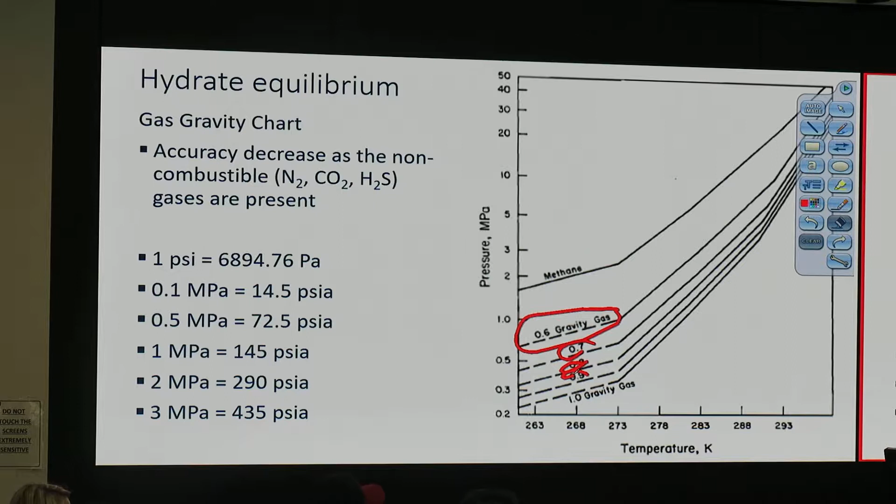Another way of looking at hydrate phase envelope, we can predict it based on gas gravity. This is 0.6, 0.7, 0.8, 0.9. How much is the methane molecular weight? About 16? Around 16, so methane is 16.

Why do some gases have a specific gravity of 0.9? What happened? What do you think happened that makes gas have higher specific gravity? He said it's heavier. How come methane becomes heavier? When you produce from the reservoir, does it give you pure methane? Will it give you propane, butane, maybe C5, C6, a little bit, maybe C2? It gives you all things.

Can it give you carbon dioxide? Is carbon dioxide heavier than air or not? What's your name? Zach, what is the molecular weight of carbon? 12? What about oxygen? 16, oxygen twice is 32, plus that becomes 44. 44 is more than 29 or less than 29? So carbon dioxide has higher density than air. So if you have methane plus carbon dioxide, your gas gravity can be 0.8, 0.9, or something, it could be more than 1.

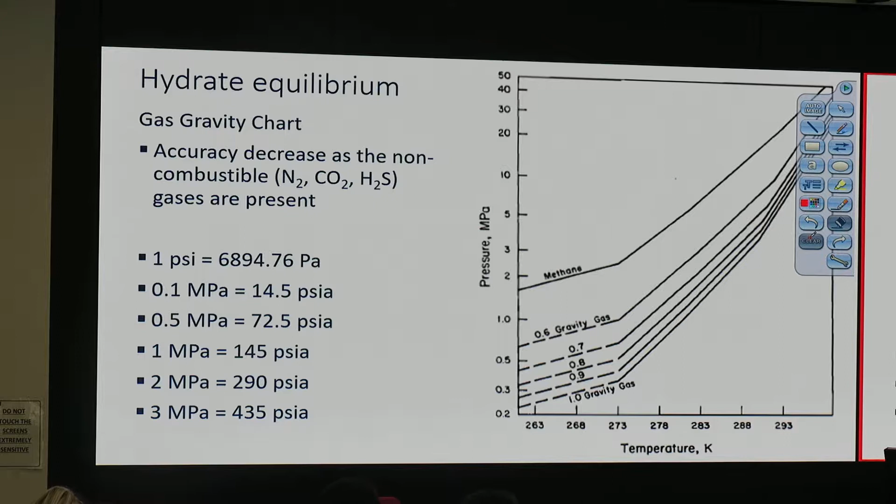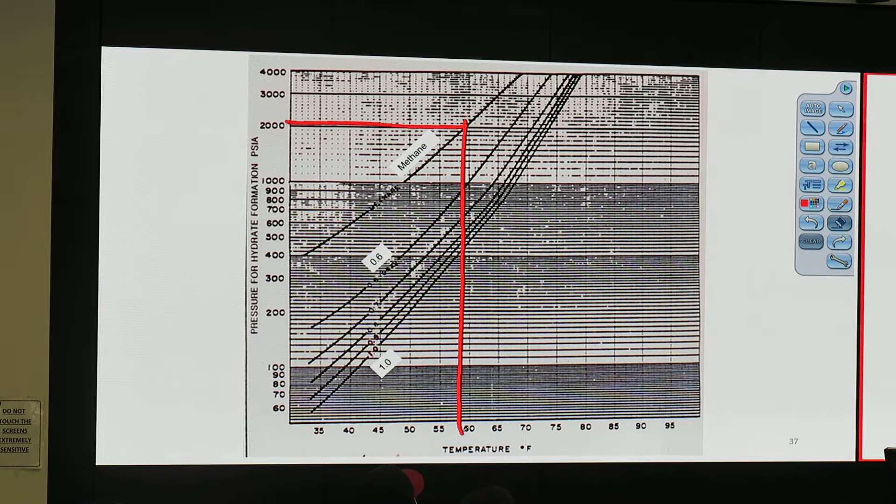Here's another chart that's in PSIA, maybe this helps you a little bit. This is in Fahrenheit. So if I have the pressure before the line heater about 2000 psi, pretty high, this tells me at about 59 Fahrenheit we will form hydrate. 59 and below. So if I have gas coming in at 2000, it's pure methane. We have gas coming in at 2000 psia, and my temperature is 70, I'm fine, I don't form hydrate. But if I'm at 50, sometimes it gets a little bit cold, like a snowstorm, we may form hydrate, and that may not be good. This chart can tell you that.

Do you know how to read the chart? It is going to be in the exam somehow. Any questions on the chart? Okay, let's move on.

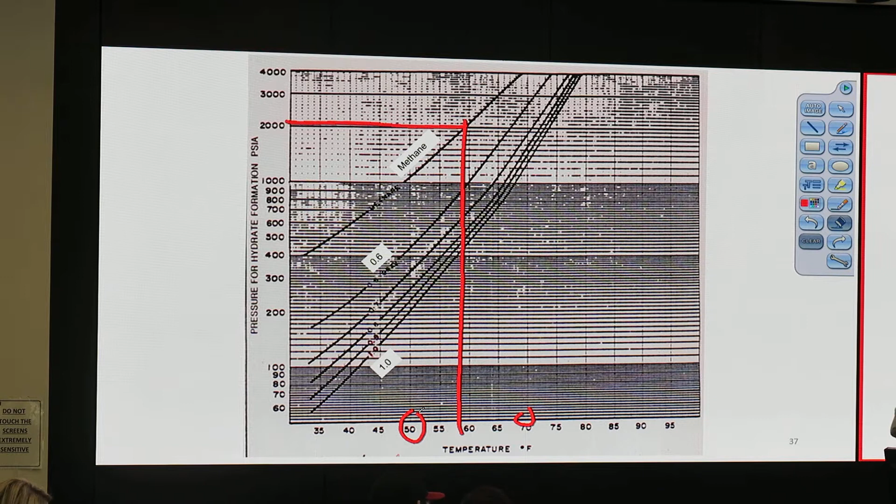Preventing, how do we prevent it? We avoid it, we don't want it to form. We may avoid going inside the hydrate phase envelope, or we put inhibitor in, or we remove water, dehydration. How do we remove water? I know I didn't teach anything about that yet, but what do you think? Dehydration, what is the chemical inside? Is it green? Maybe it's not green. Yes, it is glycol. We can use glycol to remove water.

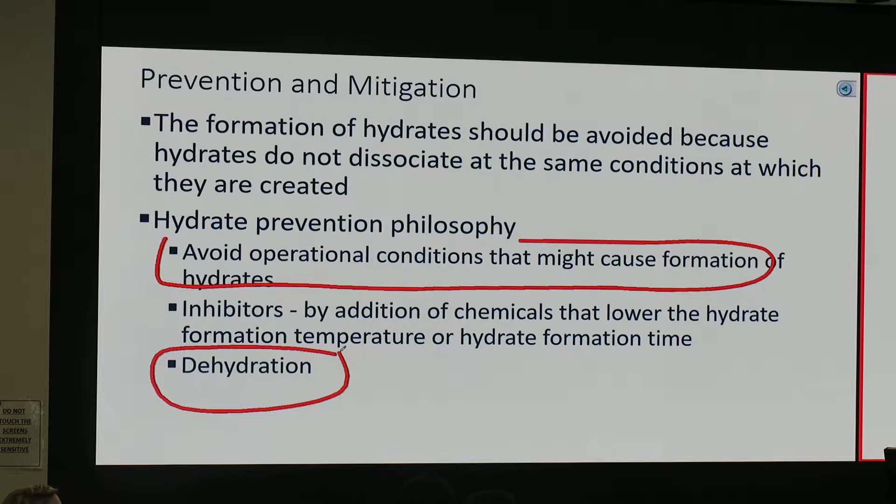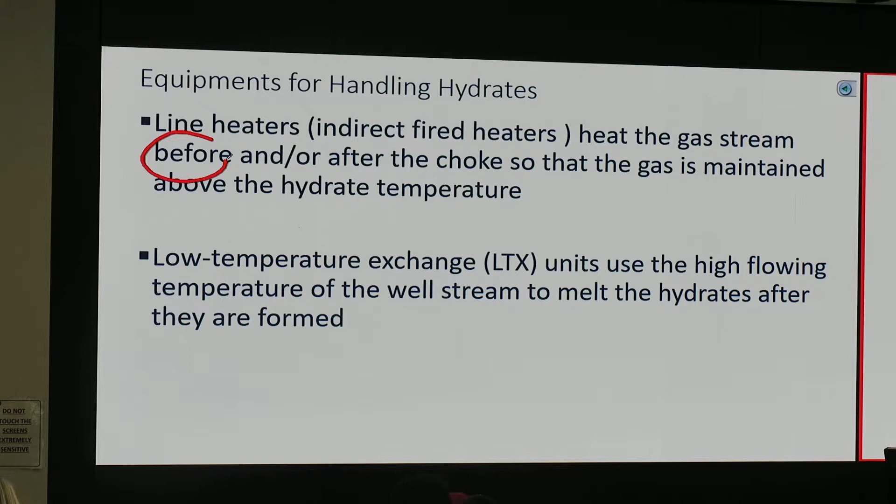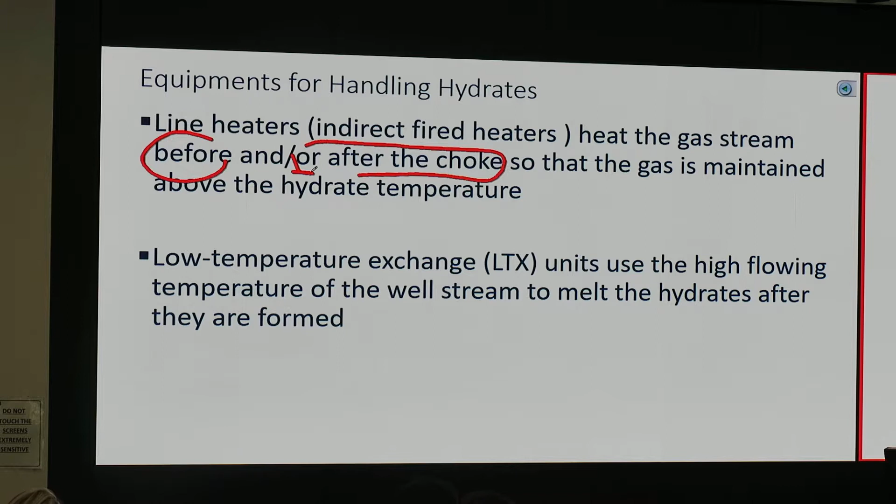So to handle this hydrate, we can use a line heater. Line heater came up in the test a couple years ago. I asked if the line heater is a direct heating unit or indirect heating unit. Many people failed, so it's an indirect fired heater. It heats the gas stream before, and it could be before or after the choke, but mostly before. Sometimes very rarely it's after, but most of the time it's before. So the gas maintains above hydrate temperature all the time, both before and after choking.

So when we choke, the temperature will drop. How much will the temperature drop? 10 Fahrenheit? Kenny, how much will the temperature drop from hydrate? It's going to depend on the temperature drop or the pressure drop. I don't know either. We look at the chart. The chart will tell us, but we need to know how to read the chart.

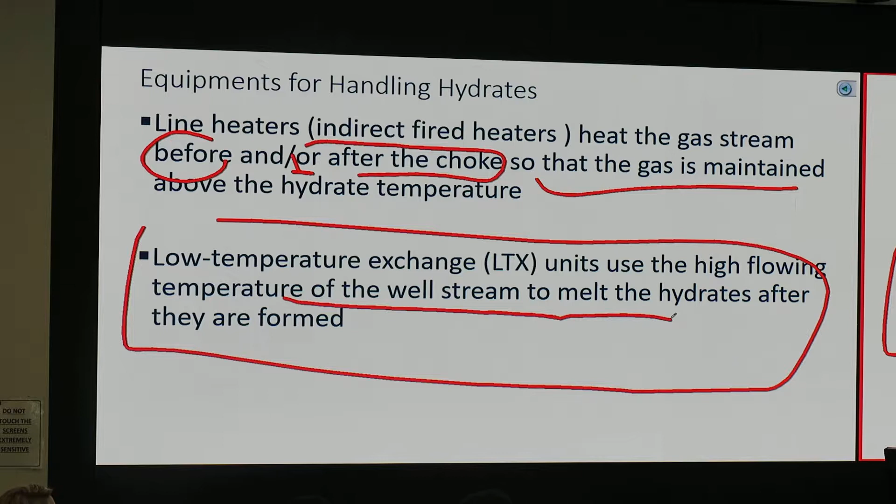Another unit is LTX, low temperature exchanger. This one operates in a different way. It lets hydrate form and uses the heat from the flow itself to melt it, the temperature of the well stream to melt the hydrate after they form. So it lets hydrate form.

Temperature drop calculation, this is about JT cooling. It's not always cooling. At the high pressure case, when the pressure drops, it can be hotter. But most of the time, at the lower pressure case, when the pressure drops, it's cooling. Most of the time it's cooling, but it can be heating too. I will show you in the Mollier diagram what case it will be heating.

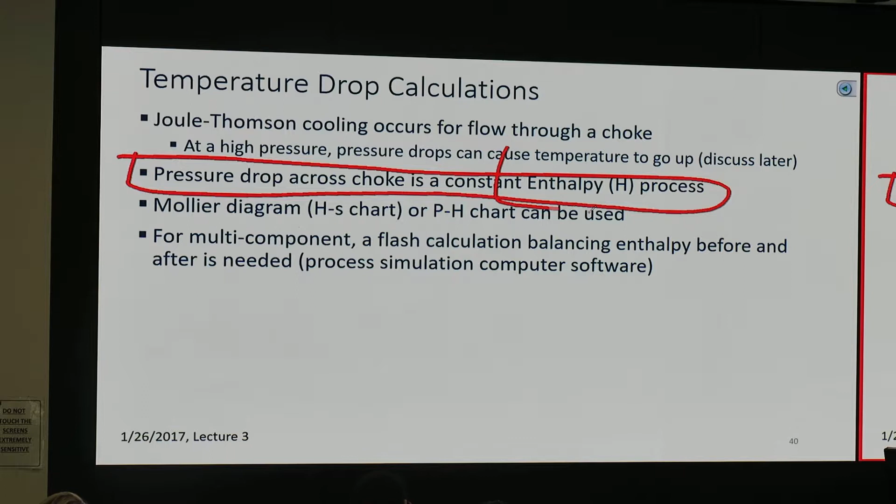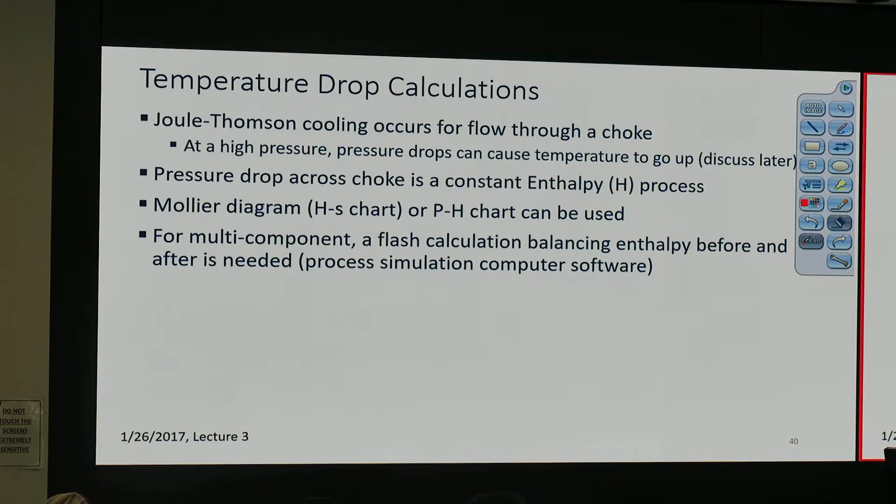One thing you need to memorize: pressure drop across the choke is a constant enthalpy process, or you can roughly assume it's a constant enthalpy process. It appears every quiz, every exam, every year, so put that in. Constant enthalpy means capital H stays the same, there's no heat putting in or heat loss during that short distance. So at the choke, it just goes through the restriction and the pressure drops a lot, but we didn't put any heat on it, or we assume no heat loss. So we use the Mollier diagram or maybe pressure enthalpy chart to find out. If we have multiple components and don't use the chart, we use software. So in this class, we teach you how to use the chart. This is the chart.

This is a pressure enthalpy chart. The one you get in the exam will be bigger and readable. This one I know isn't quite readable.

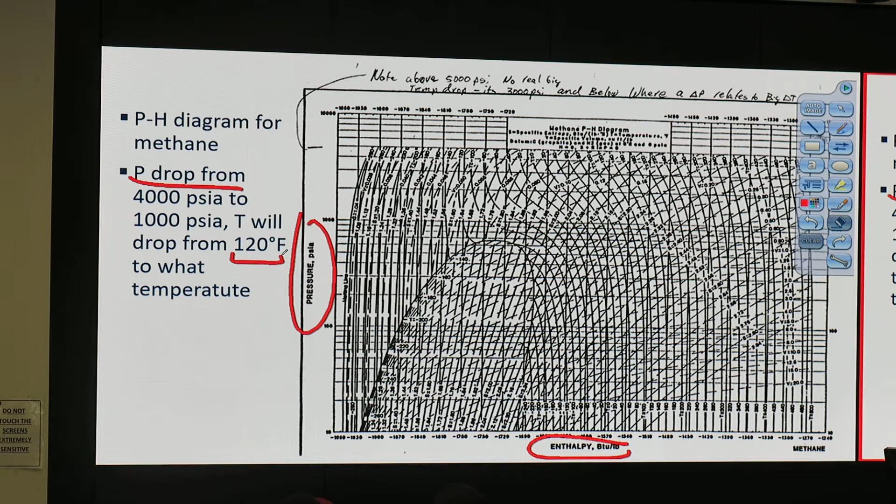Let's take a look at pressure drop from 4,000 psia to 1,000 psia. Temperature will drop from 120 Fahrenheit to what temperature? First, assume that we use the right chart. This says methane.

Methane pressure enthalpy diagram. If you don't have pure methane but natural gas with specific gravity of 0.7, use the chart that is for 0.7.

This means you need to know how to calculate specific gravity of gas. Who knows that or who doesn't know that?

Maybe my question isn't quite specific. If I have 90% methane, 10% carbon dioxide, do you know how to calculate average molecular weight?

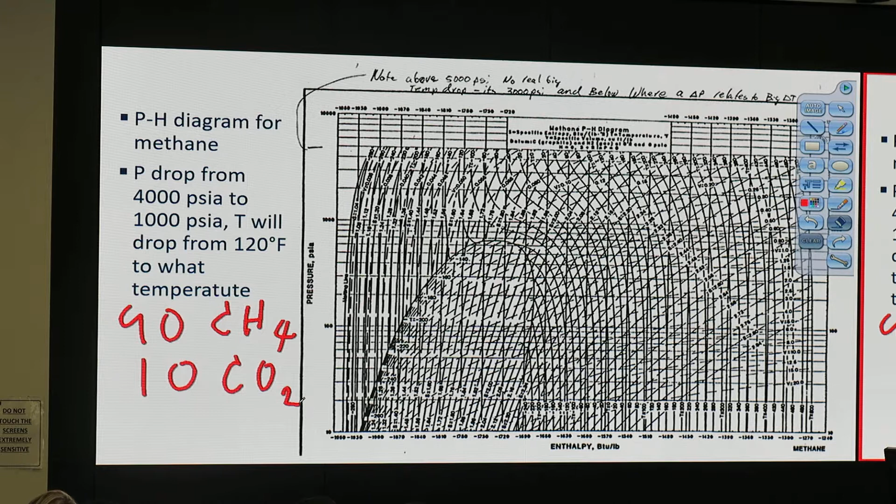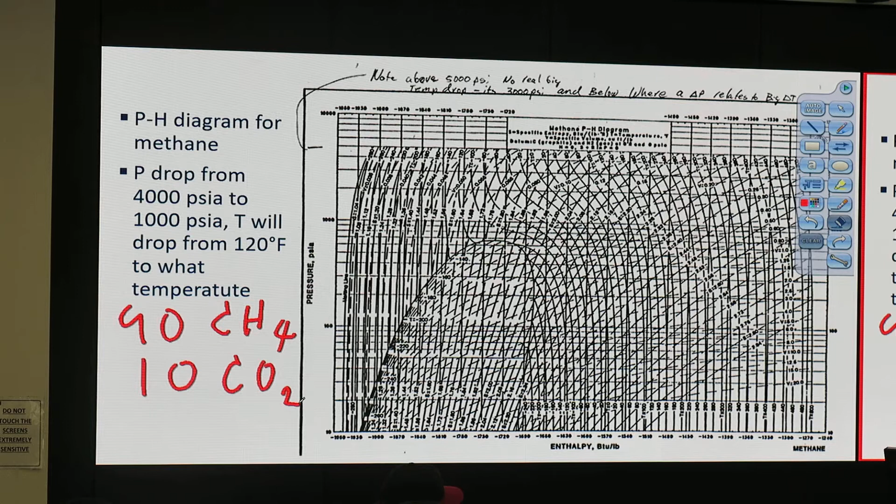You think you know? Who doesn't? We'll have the lecture about that, but it's important. Because if you don't know that, you don't know which chart to use. I give you 5 charts, you use the wrong chart, the answer is wrong, say it with me here.

How do we read that? First, we need to know which line is which. You see the red line over there? That one is a constant temperature line. So this axis is pressure. That red line is a constant temperature line.

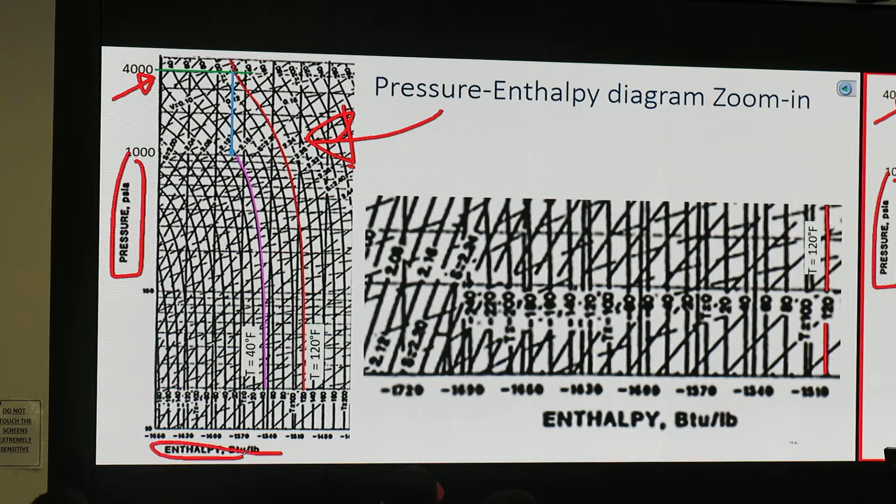The horizontal green line is a pressure line. The place where red crosses with the green is your starting point. We start at 4,000 psia and 120. We have pressure drop across a choke, which is a constant H or constant enthalpy process, enthalpy doesn't change. So we just move down vertically.

Until we meet the line that has pressure of 1000 psia. Then we read the temperature using the purple line. The purple line says that is 40 Fahrenheit. Then we know temperature will drop about 80 F. Good?

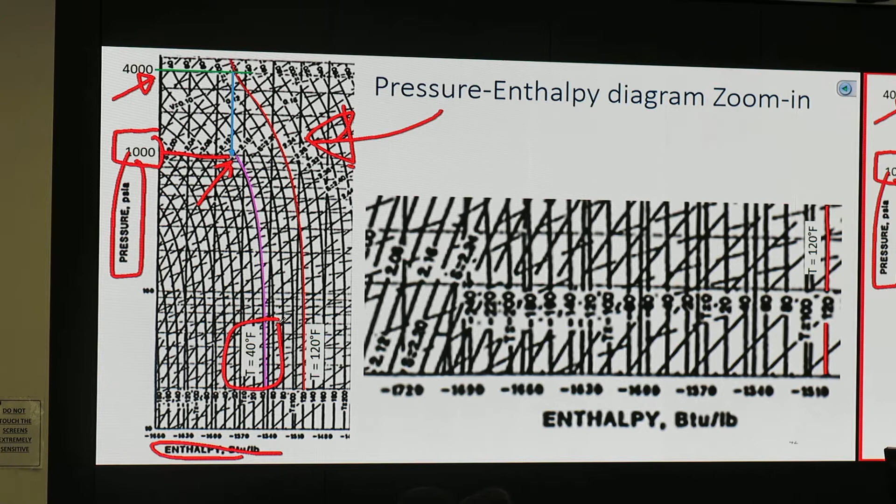Next method, we can use this chart for a quick approximation. This chart talks about temperature drop. Initial pressure in PSIG. This chart is from GPSA. So how do we do that?

We start from 4000 PSIG. How much is the pressure drop? This line on the curve side is delta P. 4000 minus 1000 is delta P of 3000. So we select this line, delta P of 3000. I move up, reach that point, move to the left, and read the temperature drop. Temperature drop over there says 80 Fahrenheit.

Wow, this chart tells you the same thing as that graph. It's nice, isn't it? You don't see that it's beautiful? You like it? You want to learn, okay.

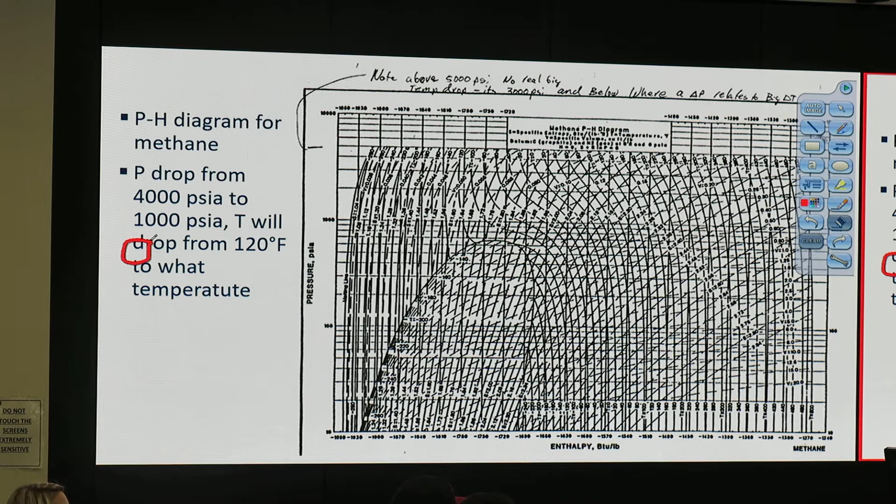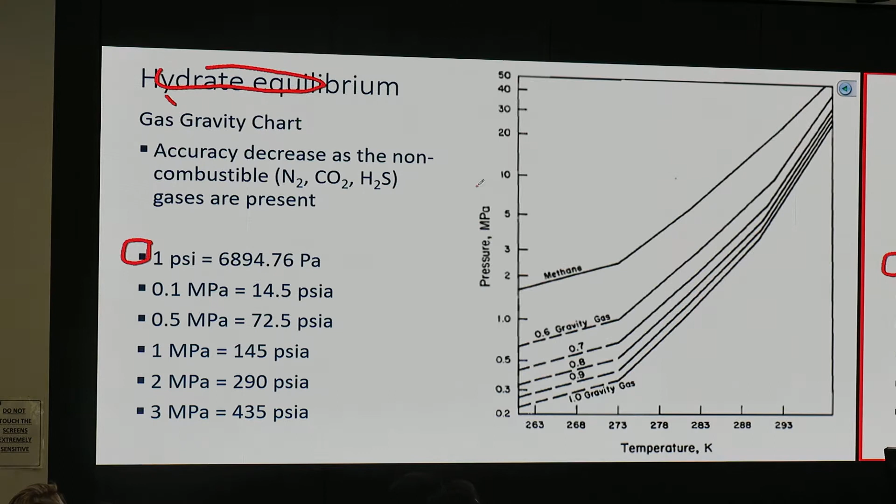So there's a correction factor. Look at this part: approximate temperature correction for hydrocarbon that contains water. This is barrel per MMCF in stock tank. MM here means 1 million. Don't get confused between this MM and this M. What is that MPa? Megapascal, it's not 1000 Pascal.

There's a correction factor. It says if we produce water with it, do you think we'll have more temperature drop or less temperature drop if we produce water along with it? More, raise your hand.

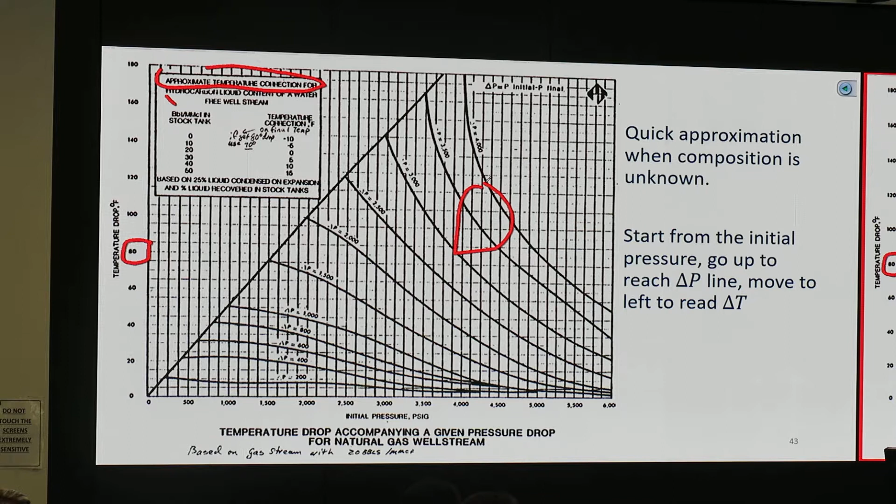Leonardo, okay, more or less? If you produce water with it, will we have more temperature drop or less temperature drop? Less. Okay, let's take a look at this.

More liquid condensed, less delta T, correct. So what we did is use a correction factor. If oil production is 20 barrel per MMCF, no correction factor is needed. If we don't produce any oil, correction factor is minus 10. So what I did is 120 minus 80 and minus 10. We totally have 90 Fahrenheit drop if we don't produce anything.

It may be a little difficult to read, but make sure you understand that if we don't produce any liquid along with it, we have more temperature drop. If we produce a lot more liquid, we have less temperature drop.

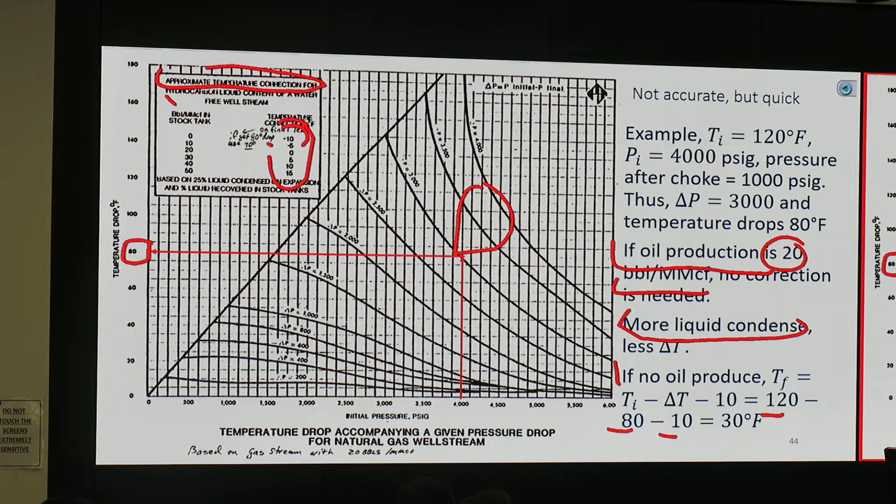What is how much is specific gravity? Oh, I'm sorry, CP, specific heat of water. So what? Specific heat capacity of water. Or how much energy do you need to raise the temperature of 1 kilogram up by 1 Kelvin?

We have water, 1 kilogram of water. I raise it up 1 Kelvin. How much energy in Joules do you need? You raise it up to 1 what? Kelvin. What is Kelvin? 1 Joule, I think I tricked you, okay?

If you have 1 pound of water and raise it up by 1 Fahrenheit, I think that would be 1 BTU or something. But in SI units it's 4,000 something. You need about 4,000 joules to raise the temperature of 1 kilogram of water up by 1 Celsius or 1 Kelvin.

Specific heat of water is more than the gas, so it can resist the change better. It doesn't want to change. We need a lot more heat loss to change the temperature of water than to change the temperature of air or gas, mainly because of specific heat capacity. So if we produce water with it, we don't have much temperature drop.